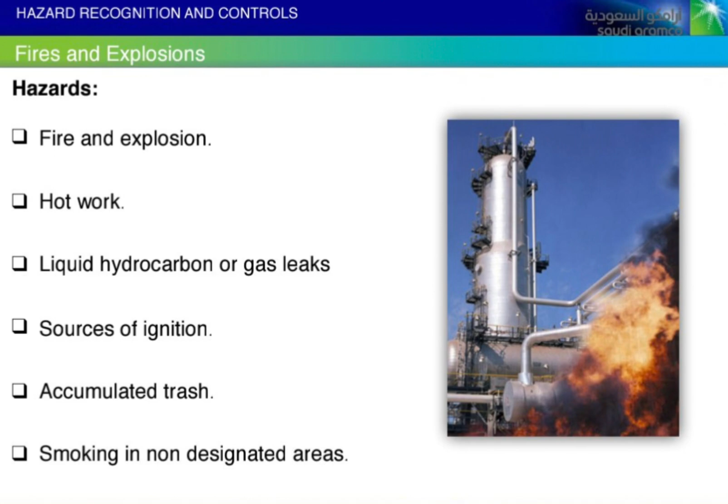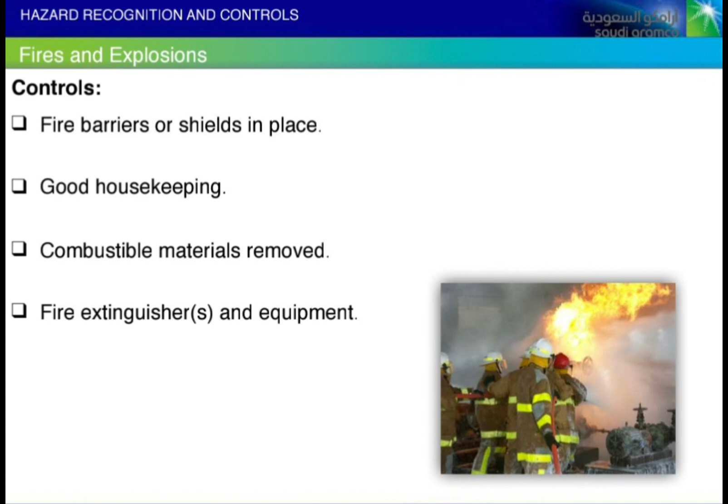Fires and explosions. Hazards: fire and explosion, hot work, liquid hydrocarbon or gas leak, sources of ignition, accumulated trash, smoking in non-designated areas. Controls: hot work permit, monitoring of work, gas testing, areas wetted, fire barriers or shields in place, good housekeeping, combustible materials removed, fire extinguishers and equipment.

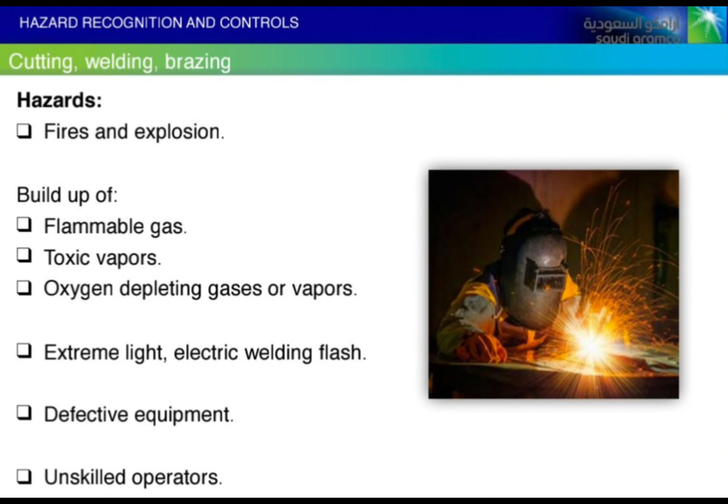Cutting, welding, brazing. Hazards: fires and explosion, buildup of flammable gas, toxic vapors, oxygen-depleting gases or vapors, extreme light, electric welding flash, defective equipment, unskilled operators. Controls: equipment inspections before use, hot work permit, ventilate area, gas testing in confined spaces, welding screens for electric welding, flashback arresters on oxy-acetylene cylinders, equipment turned off or isolated at shift end.

Hot work permit controls: in hydrocarbon facilities, cover or water seal sewers within 23 meters (75 feet) of all ignition sources. Hot work is not permitted above 0% LEL. Fire protection equipment shall be readily available. For cutting, welding or open flame, fire watch shall remain for no less than 30 minutes after work is finished. Combustible material shall be protected against sparks, welding slag or heat. Open fires and/or open burning require an authorization from SA Fire Protection Department.

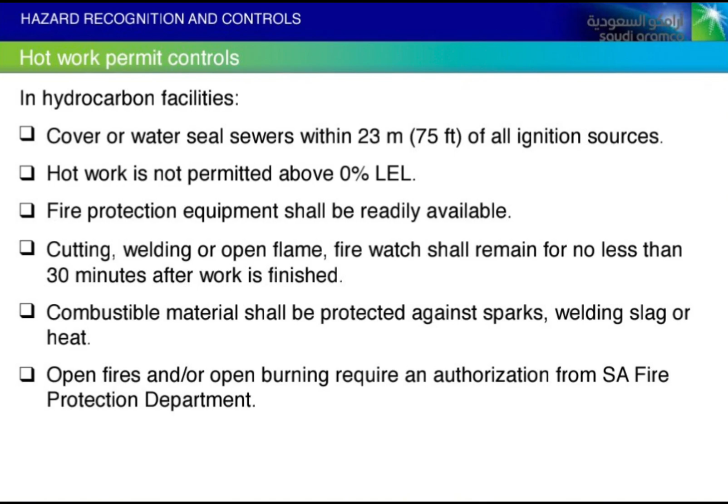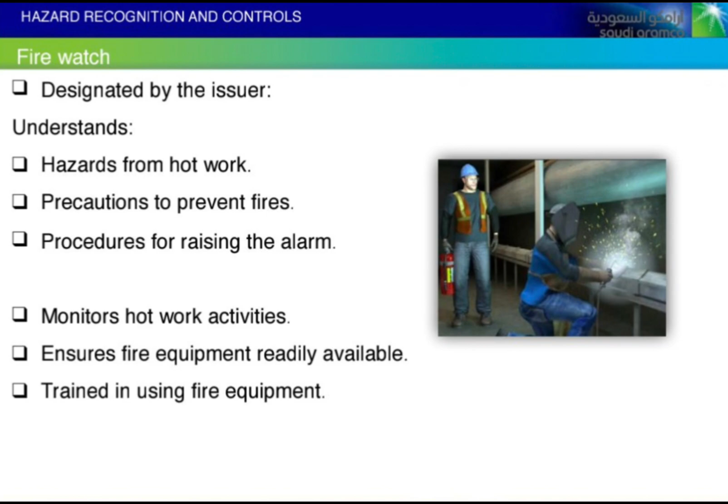Fire watch: designated by the issuer, understands hazards from hot work, precautions to prevent fires, procedures for raising the alarm, monitors hot work activities, ensures fire equipment is readily available, trained in using fire equipment.

Electrical arc flash fire hazards: fires, electric shock, exposure to arc flash, arc blast, extreme light and sound energy. Controls: hot work permit, LOTO, ground fault circuit interrupter, approach boundaries for live work, qualified individuals wearing PPE to work on electrical equipment, certified electrical equipment.

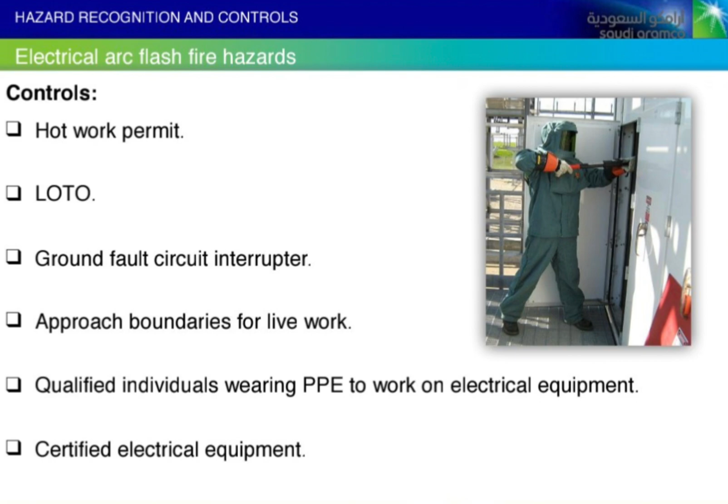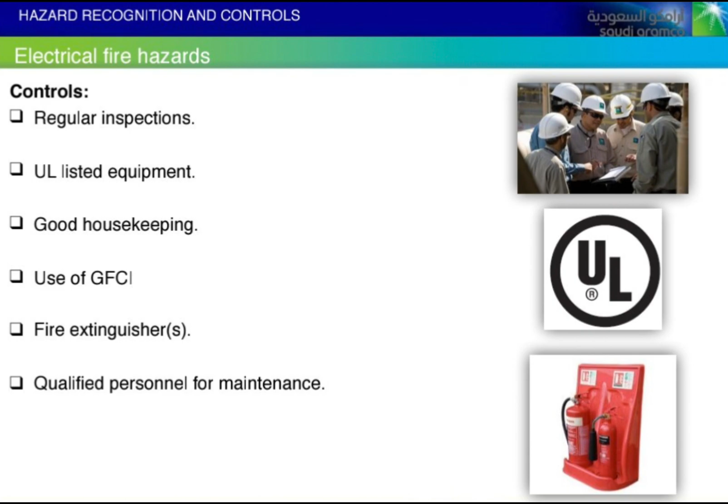Electrical fire hazards: damaged power cords, overloaded extension cords, unsafe space heaters, accumulated trash, poor storage and housekeeping. Controls: regular inspections, UL listed equipment, good housekeeping, use of GFCI, fire extinguishers, qualified personnel for maintenance.

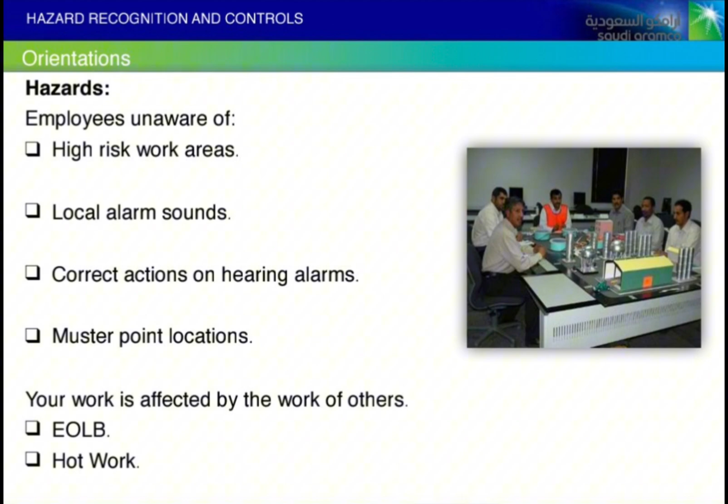Emergency preparedness. Hazards: employees unaware of high-risk work areas, local alarm sounds, correct actions on hearing alarms, muster point locations, your work is affected by the work of others, e.g. hot work. Controls: orientations for the site and work areas, awareness of local alarm sounds, awareness of response actions required, your attendance in the area is identified and logged, e.g. visitor log, surrounding jobs that may affect your work have been communicated to you.

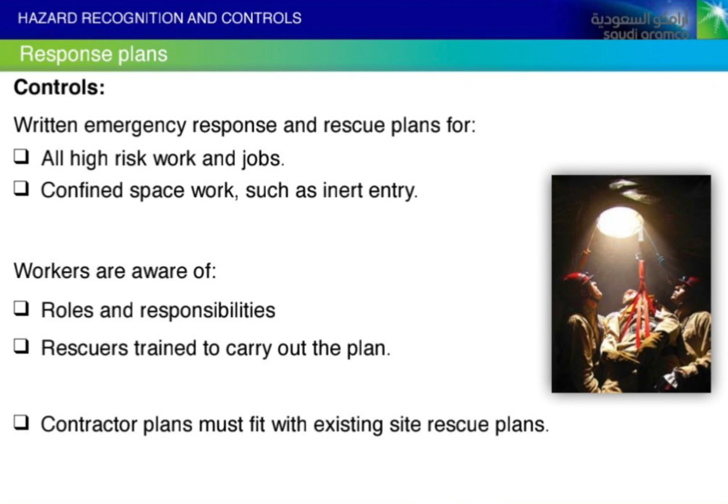Reporting and responding to an emergency. Hazards: worker does not know what is an emergency, how to report an emergency, actions to take, evacuation or muster location, no ability to report emergencies. Controls: know how to report an emergency, dial 110, radio call, training on what to do in an emergency, response actions required, alternative muster points.